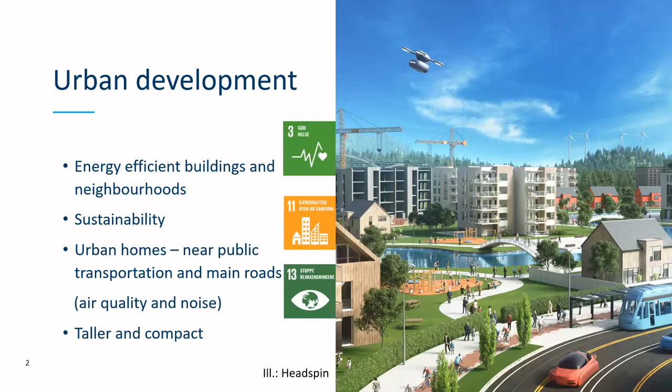Our homes are mainly apartment buildings for new residential buildings. Our homes are also getting smaller. The 2-room apartment and 3-room apartment and studio apartments are still there, but they have a decreasing number of square meters. Everything is changing a little bit.

At the same time, we see that we want more flexibility. We need another type of layout of our apartments, and we also try out new ways of layout, like sharing part of the apartment, having one room, having apartments for divorced families, and all the new ways of living.

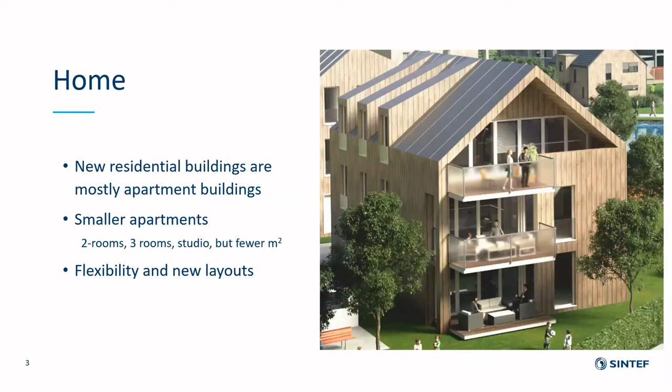I want to tell you a little bit about the Scandinavian way of living. Of course, you all know we live in a cold climate, and we like to stay at home, and we are a lot of the time inside, at least in the winter time. Because of this cold climate, we also have very well insulated buildings. Also, of course, partly because of the EPBD. We have well insulated buildings, nearly passive house level.

We have low infiltration, airtight houses, and balanced ventilation is the common way of doing the ventilation in our homes. Heat recovery with highly efficient heat recovery as well. We don't use cooling at the moment, even if that is up for discussion. We only use shading. One thing that's also a little bit challenging for us is there is no storage room for technical equipment in our new apartments.

But we do have a layout of our apartment that goes in direction of open plan, an open living room with the kitchen and living room attached. We do introduce fresh air, supply air into bedrooms and living room, and then we have the extract air from kitchen and bathrooms and toilets.

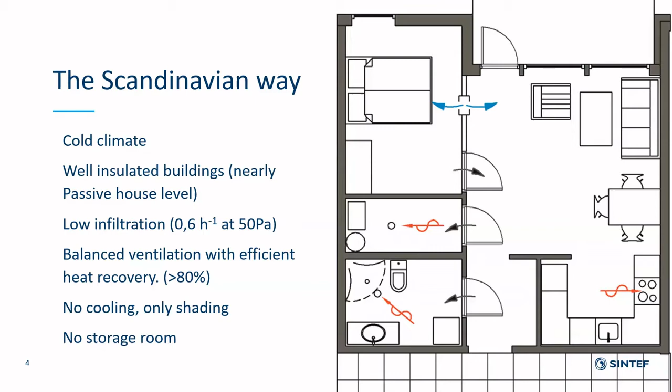The requirements in the different Scandinavian countries are a little bit different, but still similar. We have requirements that say we need a certain amount of air per square meter when we are present, and a little bit lower is allowed if you are away for a longer time. We want 26 cubic meters per hour per person in the bedrooms. But you also have to take into account the need for extract air from kitchen, bathroom, and toilets.

And in Norway, we do have both basic ventilation rates and forced ventilation rates, while in Denmark, they have more fixed rates. So one of the challenges that we are facing is that these requirements for extract air are the same even if the apartment is large or if the apartment is small. So we can end up with a little bit high ventilation rates for the smallest apartments.

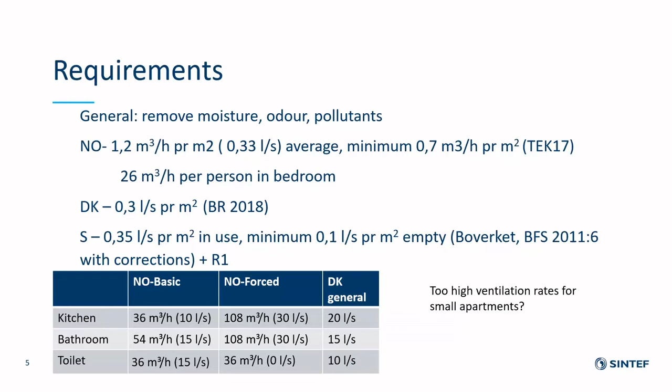Also, when talking about ventilation systems and balanced ventilation systems, we in Scandinavian countries refer to a centralized system as a system connecting more apartments to the same air handling unit. This can be placed in the basement or in the attic. And when we refer to decentralized systems, we mean one air handling unit per apartment placed in the apartment, for instance, in the ceiling by the hallway.

So it's not what you sometimes in the more southern countries refer to as decentralized and centralized, and we are not using ventilation systems located in the facade.

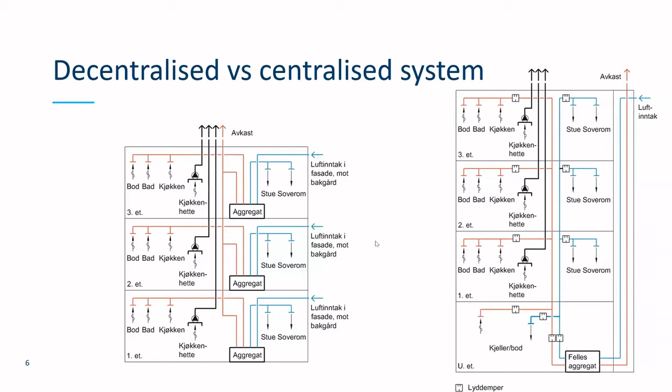What type of system is the most common one? We see from the market in Norway that a lot of new buildings have decentralized systems. And also in Norway, we do have a lot of people that own their own apartment. If you go to Sweden, more people are renting the apartment, and we also see more use of centralized systems. For Sweden, we also see that it's more common to use extract air heat pumps.

If you go to Denmark, also there it's more apartments for rent than for owning yourself. But there has been a change in the last 4 to 5 years from having mostly centralized systems and now more in the direction of more decentralized systems. And the reason for this is said to be that people preferred more control of their own indoor air quality.

The reasons for choosing the one or the other are often because of ownership, the possibility of maintenance. There could be some issues connected to access and to do follow-up and changing of filters and so on. And also for the tenants of not being so interested or able to do the necessary maintenance of the technical equipment.

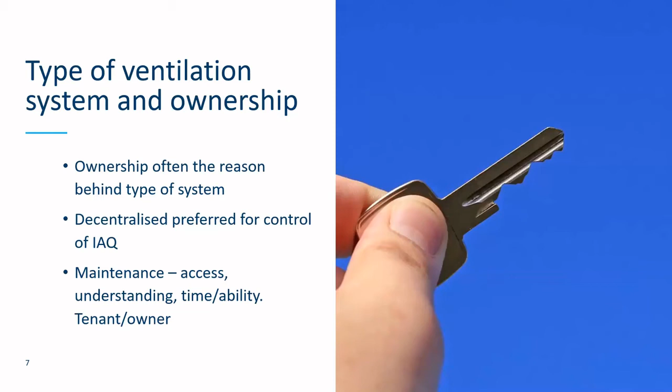Let's talk also a little bit about kitchen ventilation. The ventilation rates necessary for kitchen ventilation are not too high, and they are originally based on a situation with a cooker hood placed above the hot plate, close to a wall, and if possible, some side walls to ease the capture efficiency.

We see that these rates are not necessarily enough for good extraction of pollutants. We have a trend that we use higher ventilation rates, at least in Norway. We see that the design of the cooker hoods is changing.

And we also see that they are not necessarily placed at the wall. Maybe they are moved to a kitchen island and open space. We also know that the performance of the kitchen hood is connected to the placing of the kitchen, the possibility to open the window, and the placing of the doors. So all these things are influencing the new way of using the kitchen ventilation.

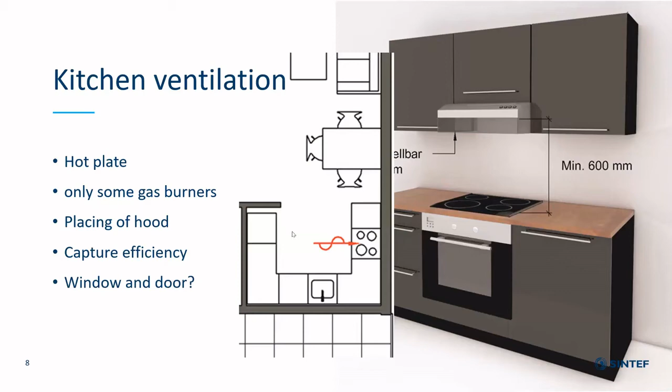I also want to mention that in the Scandinavian countries, we use electric hot plates, not gas burners, as the standard solutions. The new kitchen ventilation, as you see, could be kitchen island, open space living, airflow rates that tend to be 2, 3, 4 times the ventilation rates of the whole apartment. We are no longer always seeing real hoods. They can be angled, and the new is now also the downdraft solutions.

But maybe the one thing that is really up for discussion is this part of recirculation or not. This is not at the moment a solution that is allowed according to the building codes, but we see that this is occurring on the market, and we have a lot of discussions for the performance of these recirculating kitchen hoods. To mention about this, they can reduce odor and particles, but at the same time, we are not extracting the moisture from the apartment. So if we are going to discuss these kind of solutions, we also need to have more control of the total moisture level in the apartment.

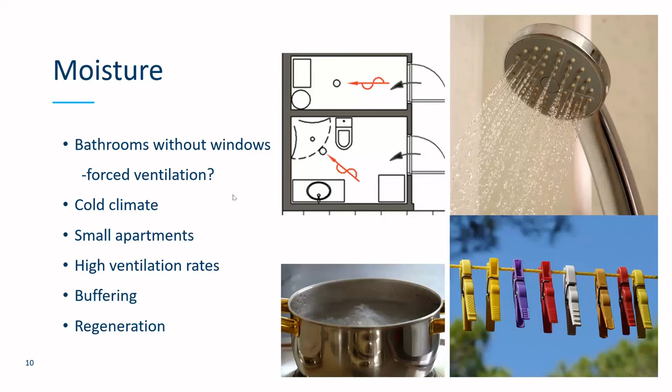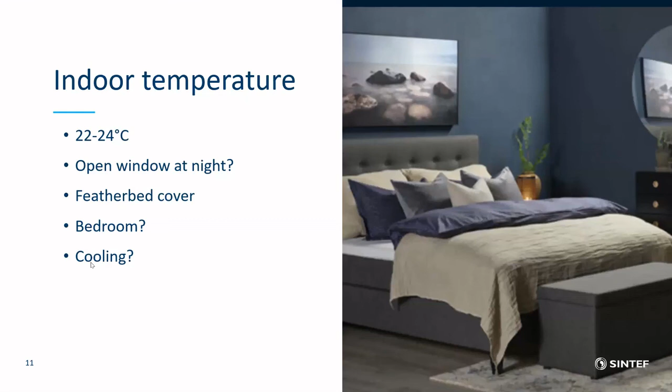But the bedroom is not necessarily only a bedroom in urban apartments. They are also used for all other activities during the day. Gaming room, playroom, in these days also home office.

What we also see as a new trend is the use of information back to the user of the apartment through apps and cloud-based systems. Until some years ago, this was not available, but now the smartness and the apps are a common and wanted solution, especially for the privately owned homes. It's a little bit different for the apartment buildings and public-owned apartment buildings compared to the more commercial buildings like schools and office buildings, which have a more advanced building management system, but we are moving in this direction.

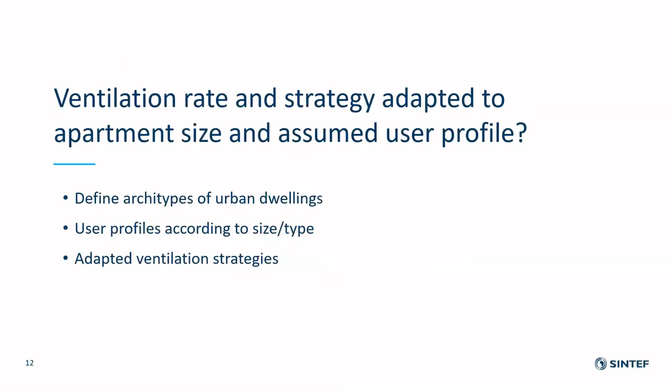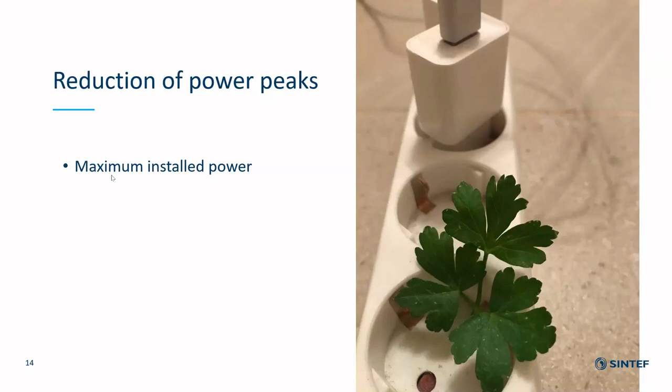We have an upcoming new research project that is going to look more into this healthy, energy efficient urban home ventilation topic, to look at user profiles and archetypes, advanced residential exposure studies combined with these cooker hood problems and issues, to study more in depth the moisture, ventilation, and building physics. And then after some years, we hope to present some good recommendations and new aspects.

We also need to be aware of upgrading, not only focus on the new buildings, if we really mean something with the sustainable neighborhoods. That's it.